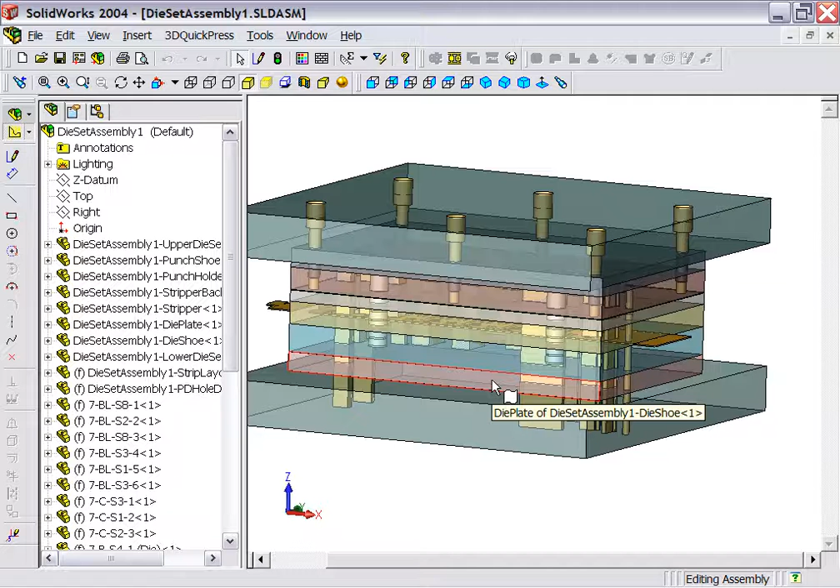Stage 5 is where we take advantage of some of the more advanced sketching tools that QuickPress offers the end user for cleaning up and detailing each given plate. Let's pick one out and open it up on its own.

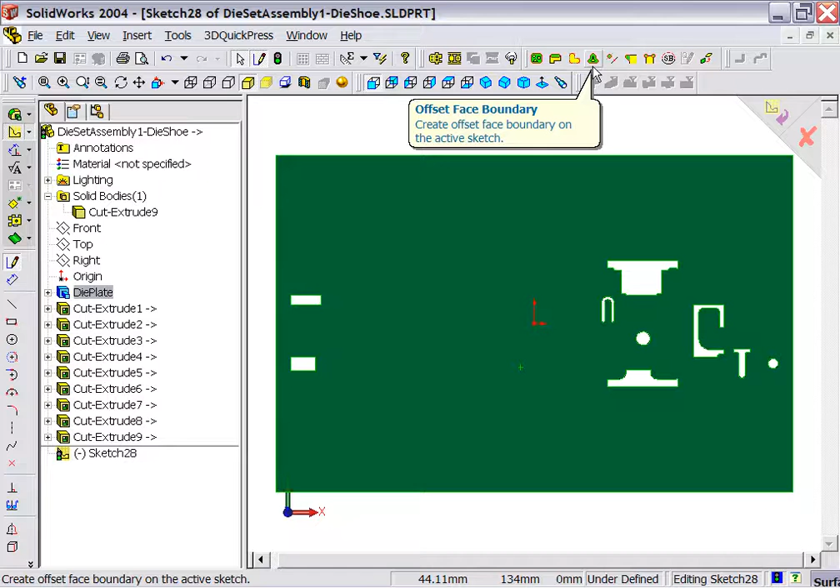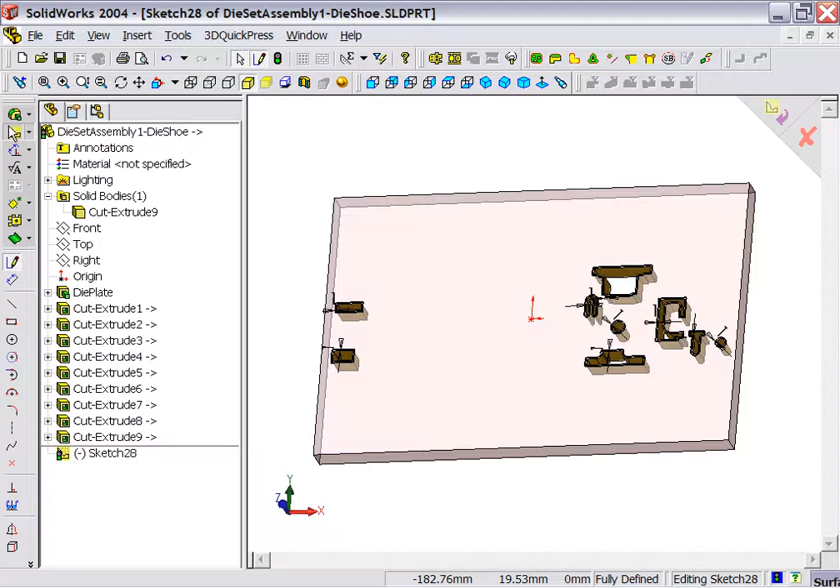You can see the clearance holes have been placed in there. However, let's say we want to offset all of those about 1 millimeter. To do that, we simply start a sketch on that face and pick the offset face boundaries, which gives us in one pick the ability to offset all those faces 1 millimeter. In this case we don't need the outside profile, so let's just delete a few lines. Then we can use that offset information to remove material by cutting through all.

Very quickly, you could do what we just did in SolidWorks. However, you'd have to pick each profile separately and offset it multiple times per hole. So this automates that nicely.

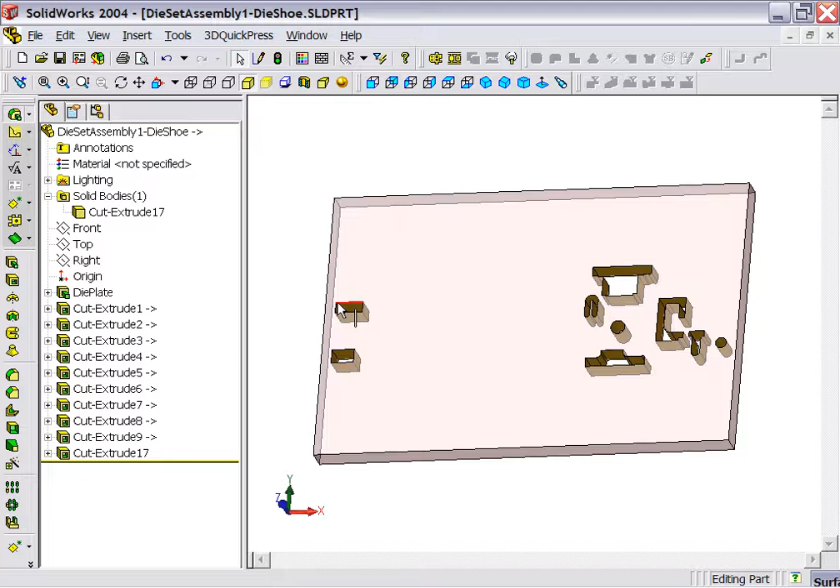The next thing we might want to do is add some corner relief to one of these openings. So let's pick here and insert a sketch, zoom up a little bit. Our corner relief tool will allow us to do circular or rectangular. All I have to do is pick on the edge, and it automatically finds the vertexes and places that rectangular relief in there. You can do circular also.

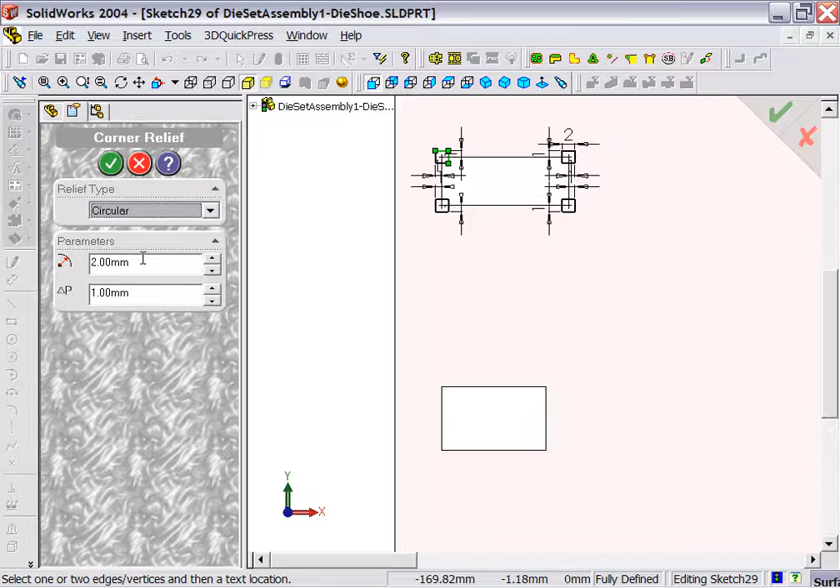Say we want to do a 2 by 1 offset. Click on that edge and it automatically adds all that geometry. Once we're done creating that, we just cut the material away and we have all those details created very easily.

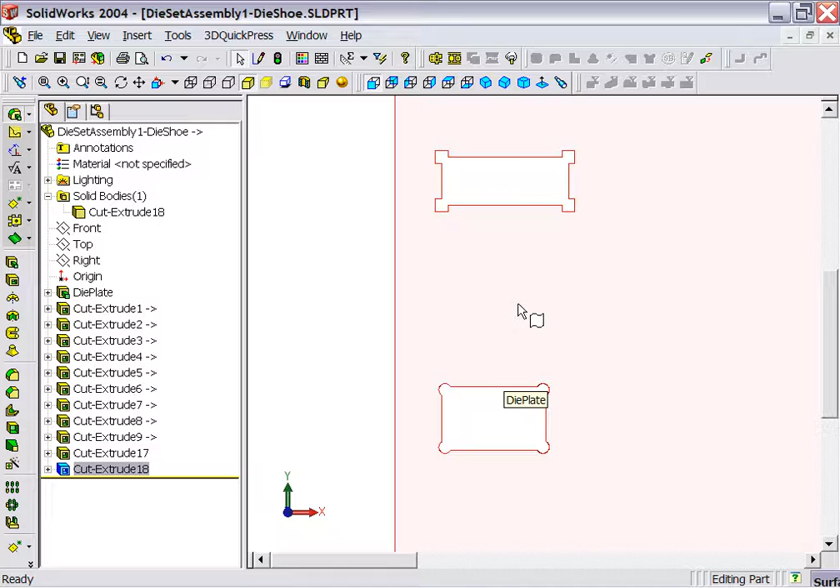Another nice tool is our bounding box options. There are two real good applications. One would be, let's say we want to create an insert of this horseshoe type opening, and we want it to be a circular section.

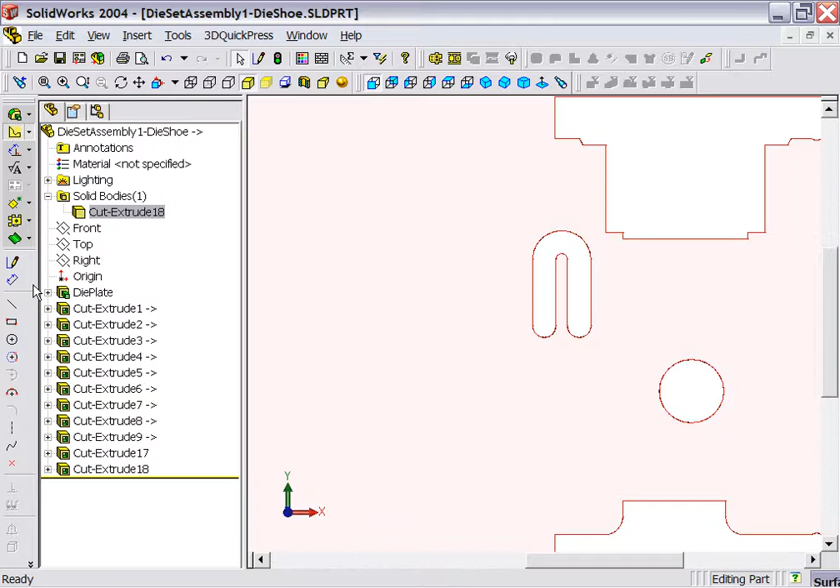Once again, we need to start a sketch and pick this face. Picking our bounding box option, we have rectangular or circular, and you can pick all types of different geometry types. In this case we're going to pick 3 circles, and then tell it what size we want it to be. Let's say 19.

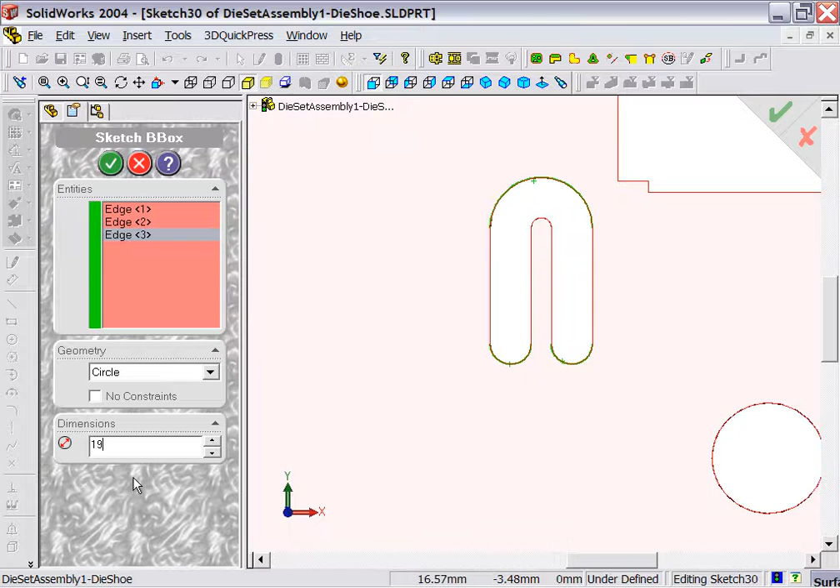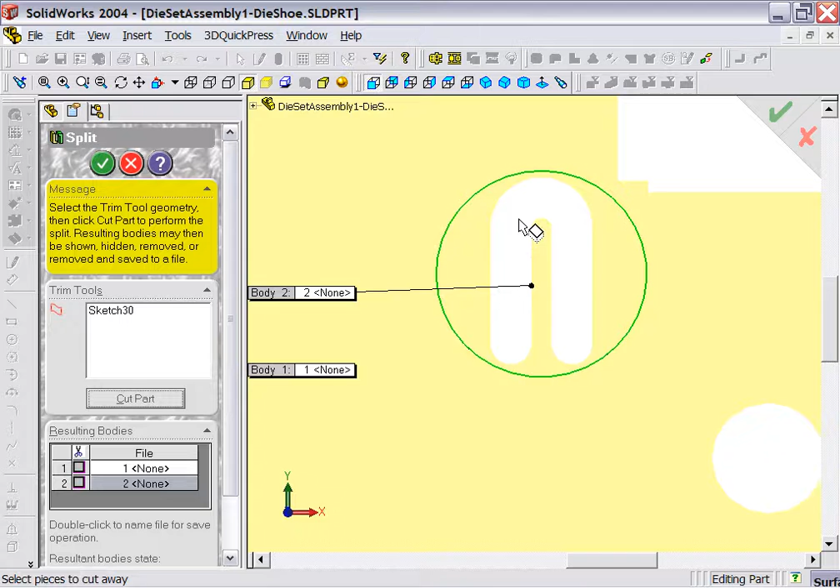Of course this is a parametric dimension, so you can update it as needed. For now, let's take that and say we want to build an insert. So now we just utilize standard SolidWorks tools, and this is called the split feature. The split feature will take the existing sketch, split the existing part, and then you can save whatever components you want. In this case I want to save both sides, but just make them separate.

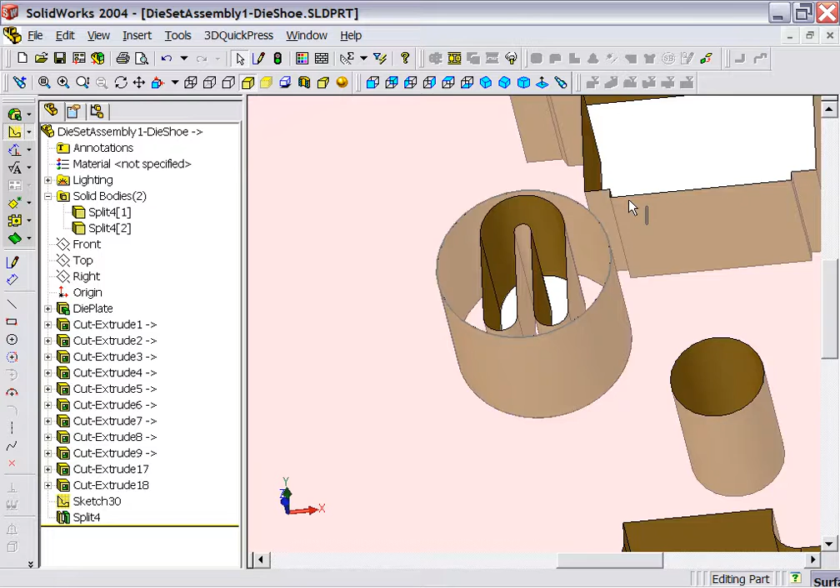So now what we have, just hiding this, is the insert on its own, and we can bring the plate back. Very quickly, utilizing the split part, we can split this die plate into multiple plates. We can remove material very easily.

Going back to the bounding box, we may want to do a clearance for these 2 openings very quickly. So we pick on that, start another sketch, and the bounding box does have a rectangular option, and it gives us a fillet radius option, and then how we want it orientated, which is very nice. It doesn't have to be always horizontal or vertical.

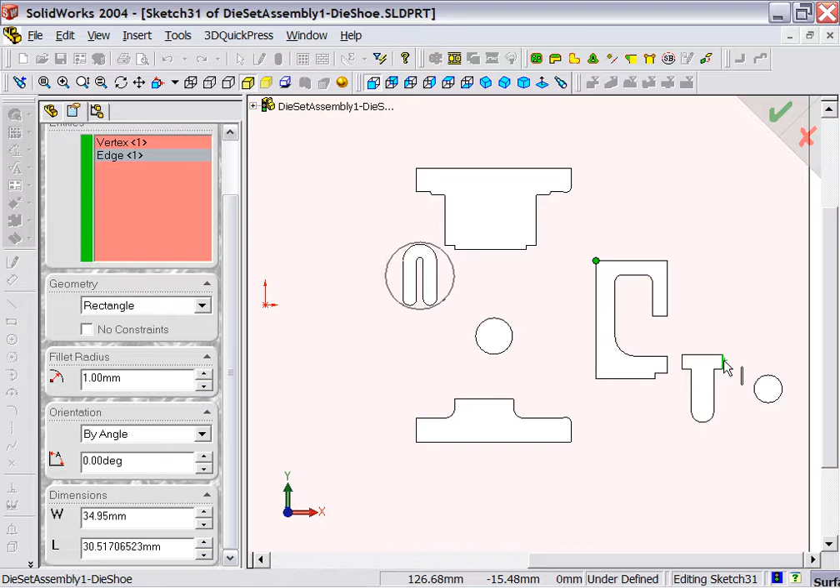So pick the geometry that you want to enclose. I can pick a point there, a line there, and an arc there, and it will automatically figure out what that rectangle should look like. That can be very tedious in 2D construction.

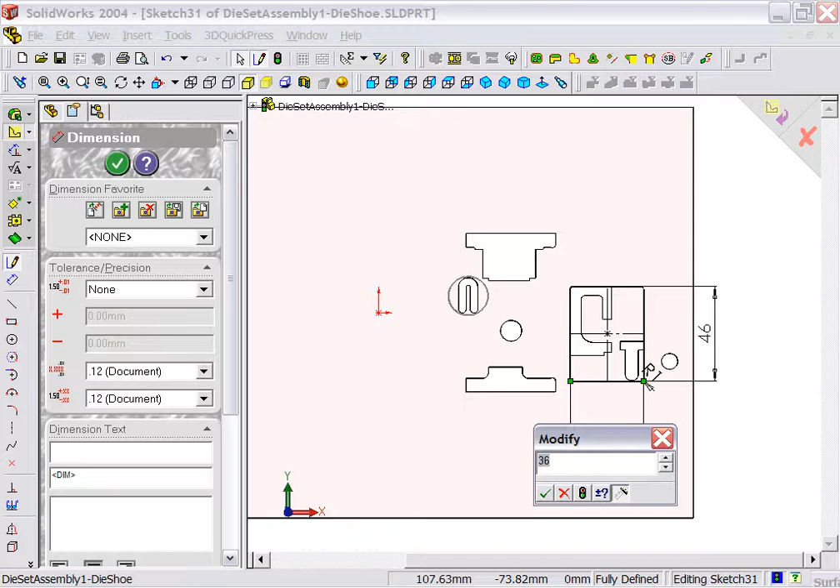So then we can offset and round off these numbers to make them a little bit larger, since I put some corner radii in there. So you might want to make this 36. Finally, just cut away the material.

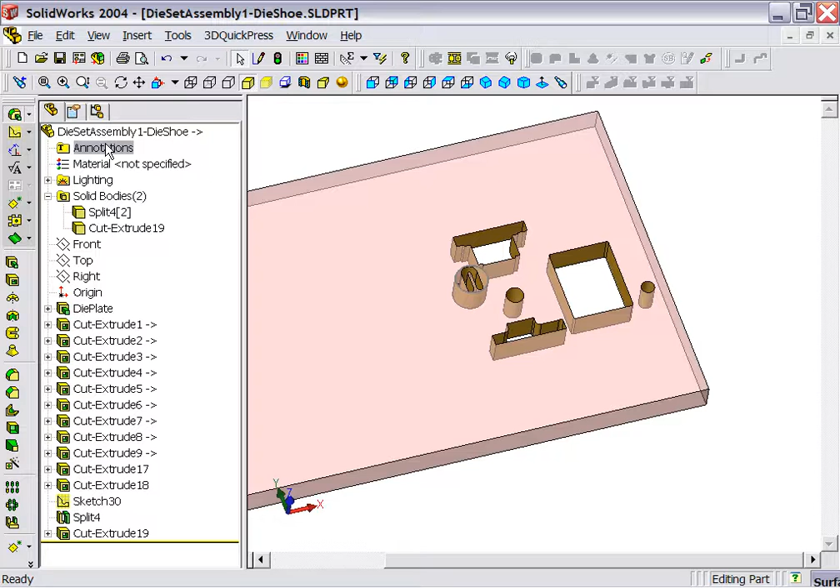We also have another handy tool that you can use throughout the process as you're building different sketches: a slot tool. That's very easily illustrated. I'm just going to throw up some geometry on the screen and create a slot off of that. It orientates itself, and you can modify it by double-clicking on the dimensions.

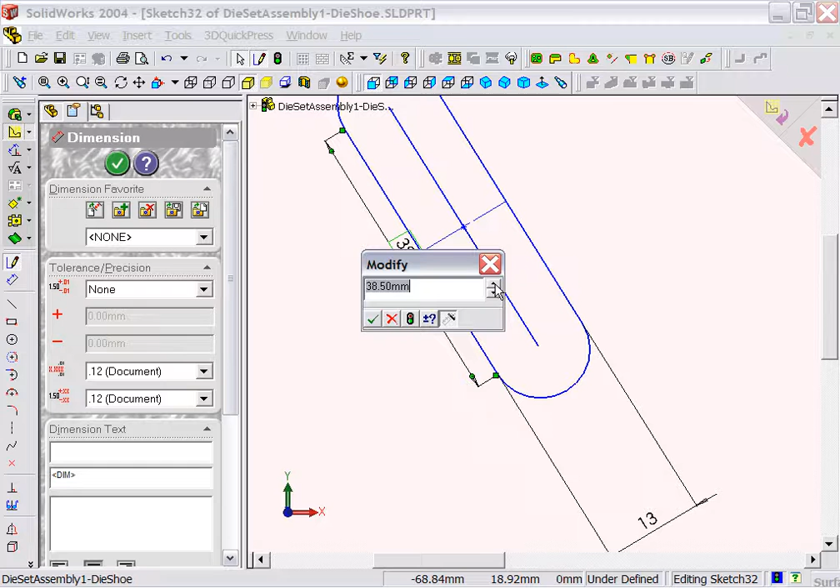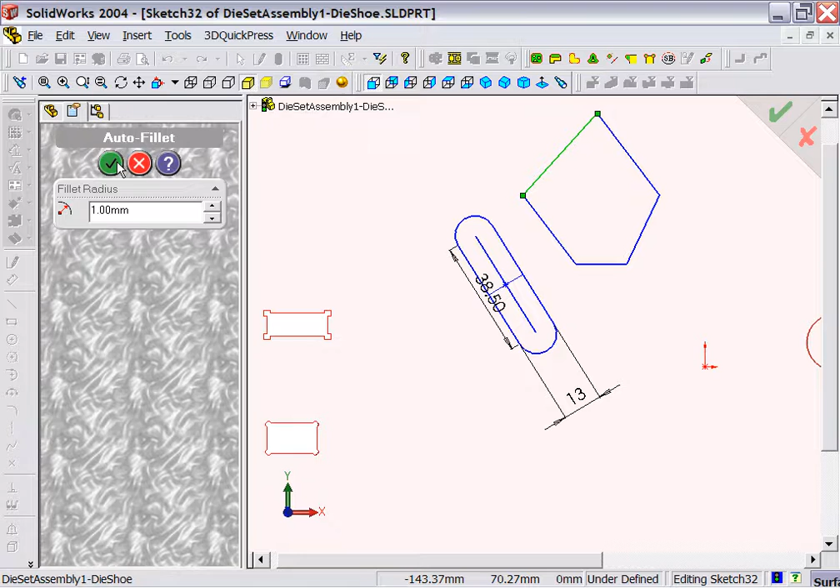We also have an auto fillet tool. If I wanted to very rapidly add rounds to some of my punches or bends, I could add those before the 3D punches were created by clicking on this tool and clicking on the profile. Let's select the profile and click our fillet tool, and it automatically rounds each corner 1 millimeter. It's a typical condition, so if we increase one, all of them will increase.

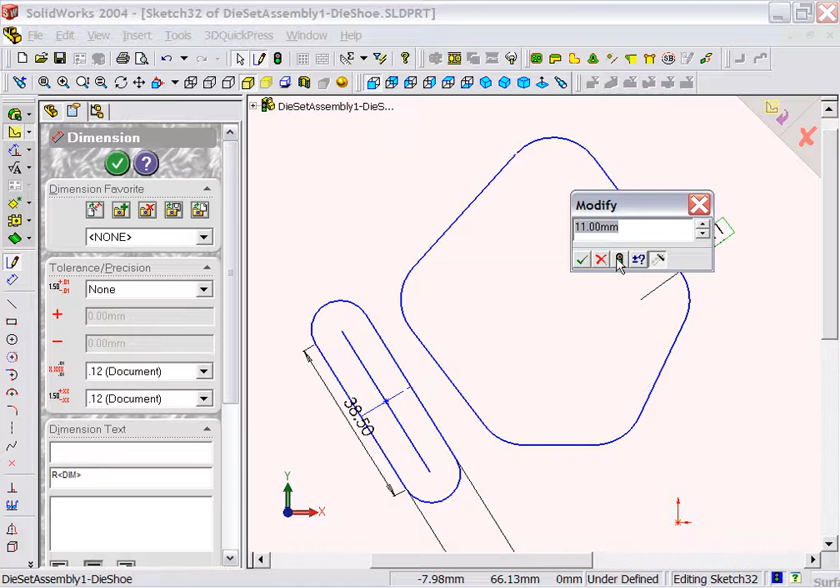Finally, we have a nice little tool for creating EDM holes. Picking on the EDM hole, we want to know the diameter of the hole you need and what offset from the entity you're going to pick. So if I pick 3 millimeters offset, 1 millimeter hole from this edge, I pick the side I want it on.

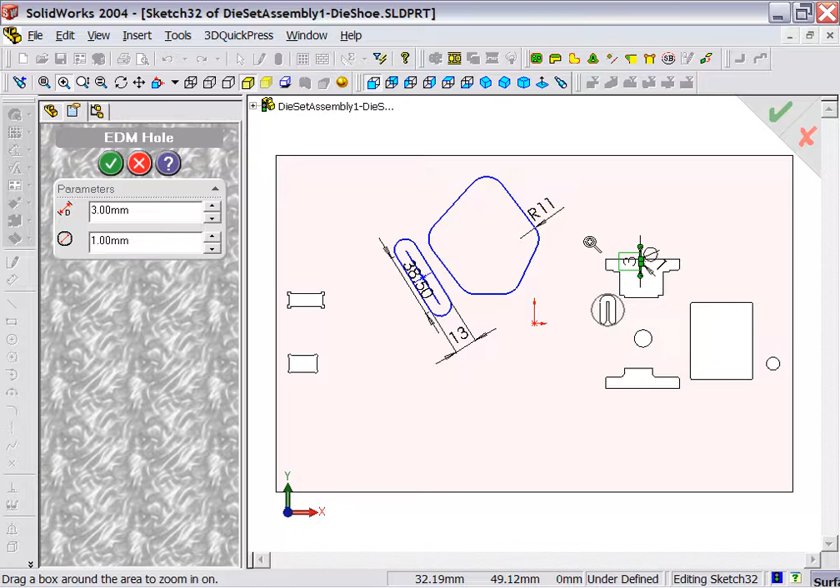I could do that throughout the process, and you can see quickly go through here, create all those, and then export that for your machining process.